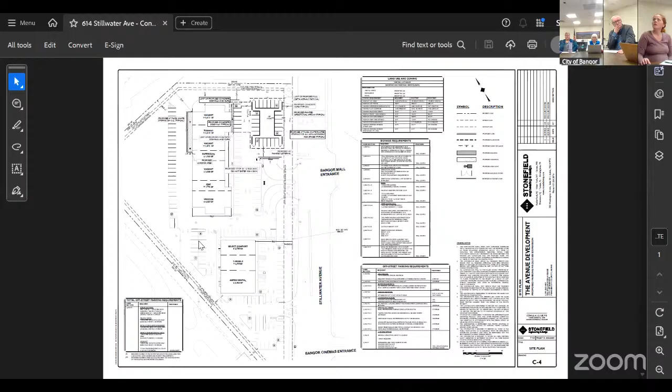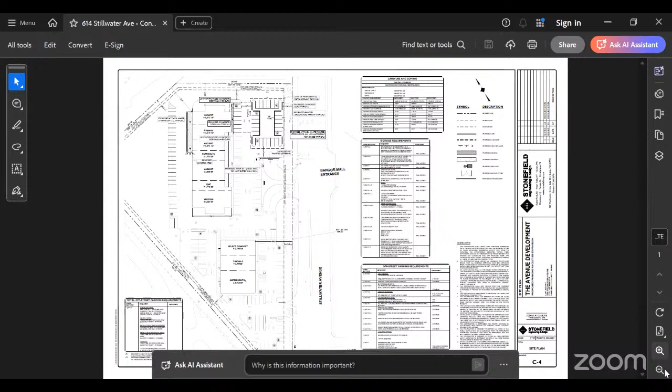Yeah, perfect. I don't know the exact timing, but a few years back we brought forth development plans for the property here located off of Stillwater Avenue for a proposed drive-through restaurant. That drive-through restaurant required us to do some selective demo, or a partial demo, of the existing building, which was once Bangor Braces and Edible Arrangements and sorts. Since working on that project, and with the increased cost for construction as well as the interest rate challenges, we've had to look at other options for this project.

Right now we have a lot of leasing activity on the existing building and really wanted to put forth a plan that would be economically feasible to present to the community to move forward, which would require us to only do a selective demo of the former Bangor Braces and then release the existing center as is with a new tenant lineup. So at a high level, I think it's important to understand that the previously approved plans right now are something that I'm unable to deliver on.

But what you see in front of you here today is a plan option that would allow us to try to revitalize the existing building that currently Verizon, GNC, Supercuts, and Subway occupy. I can defer to Josh Klein, who's with Stonefield Engineering, our civil engineer on the project, as it gets into maybe some more technical questions. But I think it's important to understand some of the history here and how we're looking to revitalize a center that has been underutilized for the past few years.

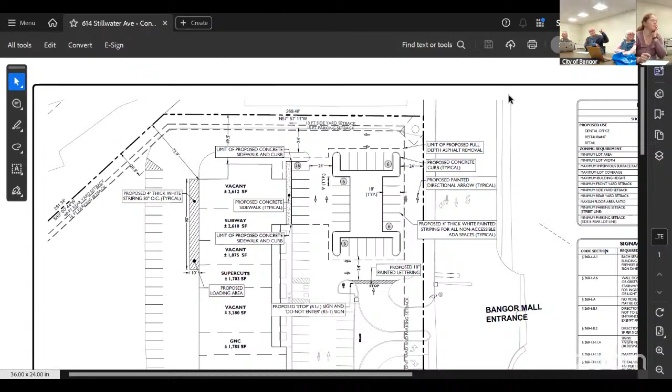So they couldn't use the old— there's a breakout along the driveway if you go into the shopping center right now, right on the left-hand side of that property, basically close to their property line. There's a breakout in the curbing that looks like there was intended to be a driveway, or they had it roughed out to put a driveway into that property at one time. So what I'm wondering is if they could facilitate that by having an alternate— it's farther up than that, more toward the back, right on the back side of the property.

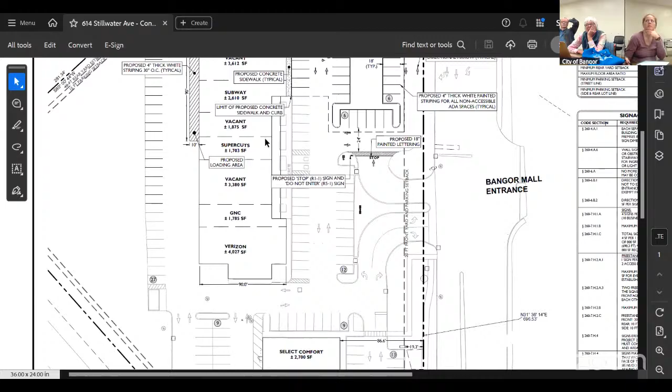So behind that set of, I assume, three businesses—that building they also own, with the T-Mobile and Aspen Dental. We own the Select Comfort building, T-Mobile, and Aspen Dental. That rough-out is right beside, right behind those buildings. Jordan, correct me if I'm wrong—I feel like when you guys came in for the original site plan, we had coordinated with you to create something on your side, but it was the property owners over here that didn't want that connection. Is that right?

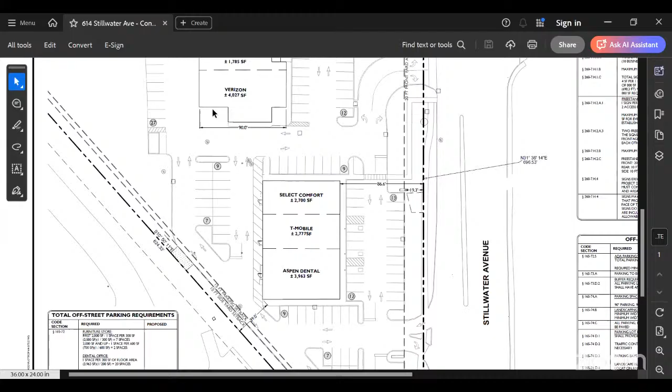Correct. I think it was a condition upon the site plan approval we received for the Starbucks development to initiate cross access. I was able to speak with the owner of the neighboring center, and they declined to do that. So I think how we were able to appease the condition was by showing a proposed cross access location on our property, due to the fact that we don't have the rights to put anything on the neighboring property. So we were open to that, based upon the initial site plan approval, but ultimately we weren't able to get the neighboring property to agree. Okay, alright, scrap that.

Otherwise, I reviewed the materials and it's not a big change. I don't have any other issues with it myself. I feel the same.

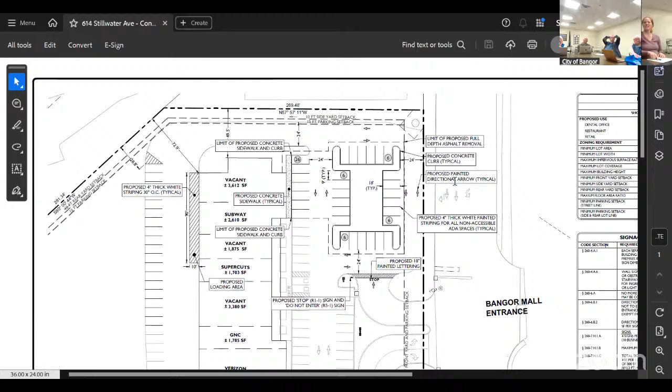David, were you all set? I'm all set, thanks. Well, if there's no questions or recommendations, then I guess you all are good to go for planning board.

So would next steps be filling out an application and going through the checklist of what would be required to go to planning board? Right, it'll be your official submission. You've already had your pre-app meeting with us, so we'll just need your application, fee, and site plan. It's the same process as last time, but if you have any questions, just send me an email.